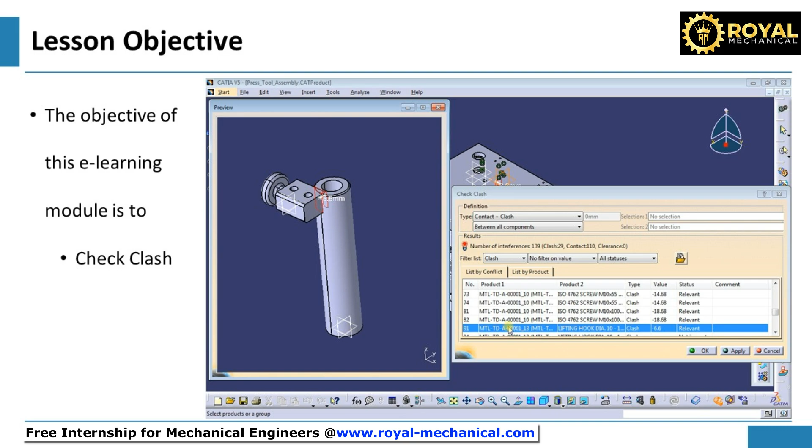Now let me demonstrate the clash check. Click on the Check Clash command. Select Contact plus Clash for the type. And then select between all components. Click on Apply. Observe the contact and clash are listed. Observe the results. There are 29 clash and 110 contacts in the press tool.

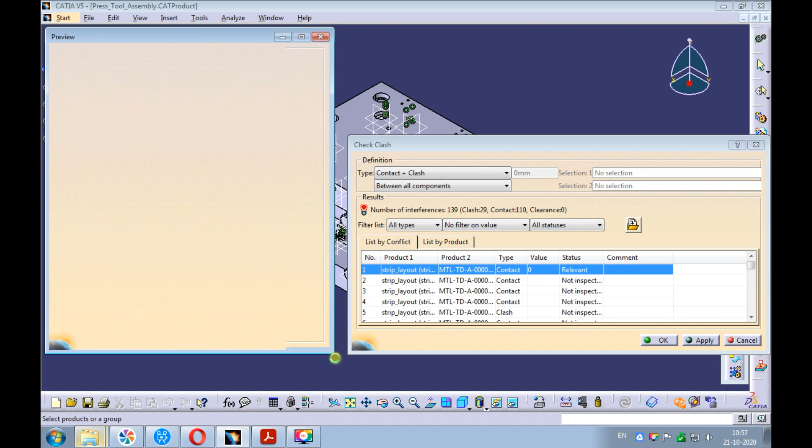Product 1 and Product 2 indicate the parts between which contact or a clash exists. The type lists whether there is a contact or a clash between Product 1 and Product 2. Observe the item number 1 is a contact between the strip and the die plate. Yes, the strip always sits on the die plate. There is nothing to worry about this contact.

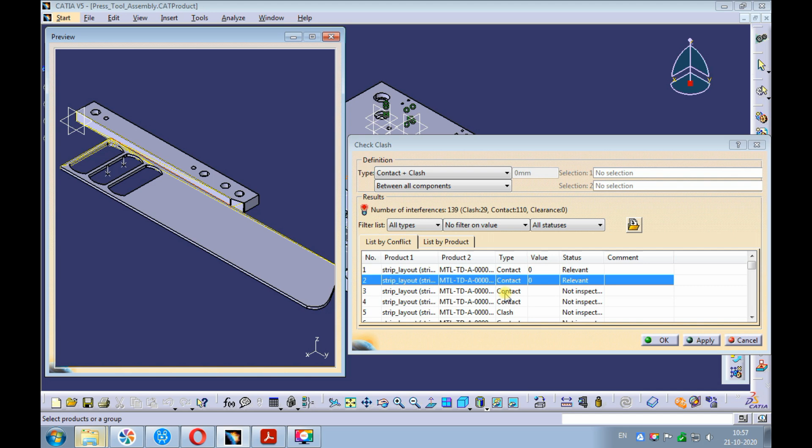Observe the item number 2 is a contact between the strip and the rear strip guide plate. Yes, the strip always touches the rear strip guide plate. There is nothing to worry about this contact. Similarly, we can check each item, one by one. Observe the clash between the strip pusher and the strip. Remember, we had designed this clash intentionally.

We can filter only the clash items by selecting Clash in the filter list. Now only the clash items are listed.

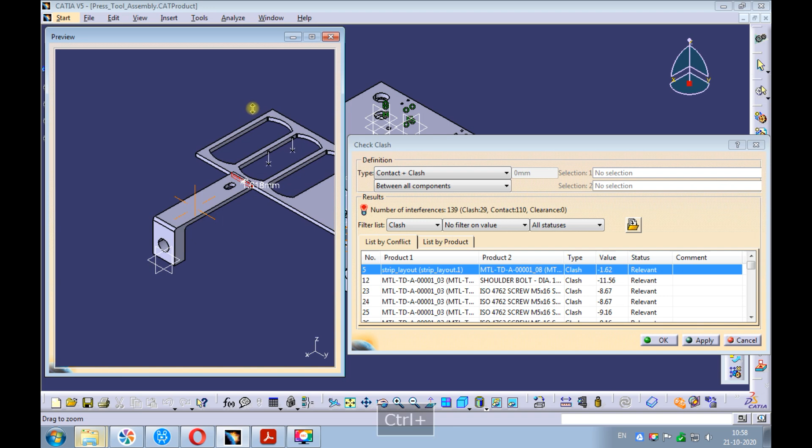Observe the clash between the shoulder bolt and the die plate. The clash between the screw and the thread is expected due to the thread engagement. There is nothing to worry about this clash. Similarly, you can observe the clash between the screws and the plates to which the screws are applied. It is essential to check each clash.

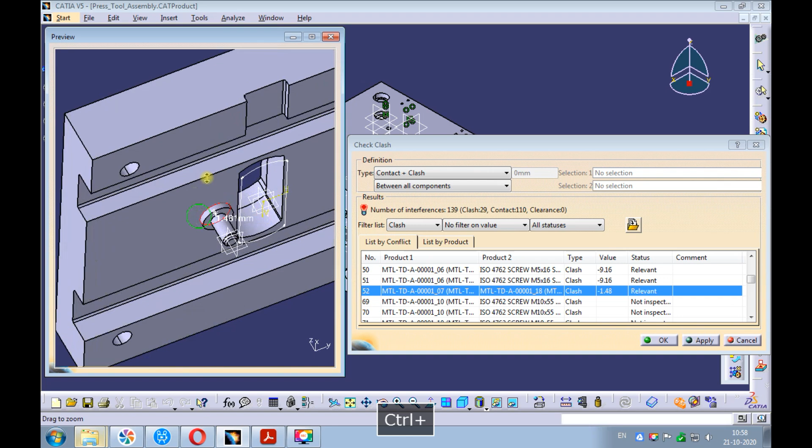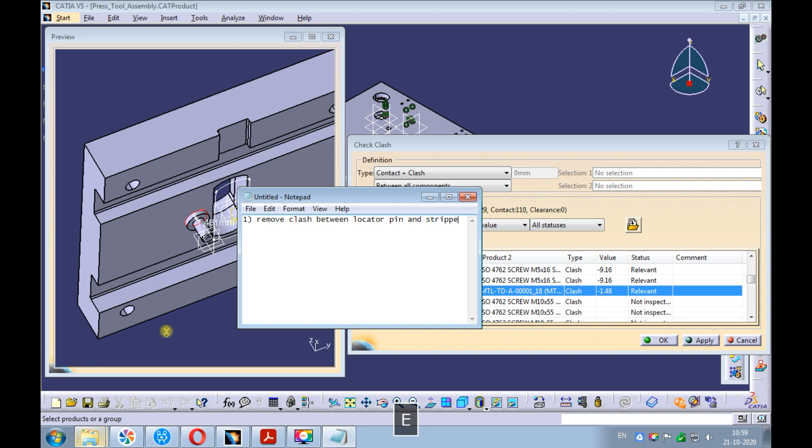Observe the clash between the locator pin and the stripper plate. This clash is critical. This clash must be removed. Let's make a note of it. Remove clash between the locator pin and the stripper plate. Let's continue with the clash check.

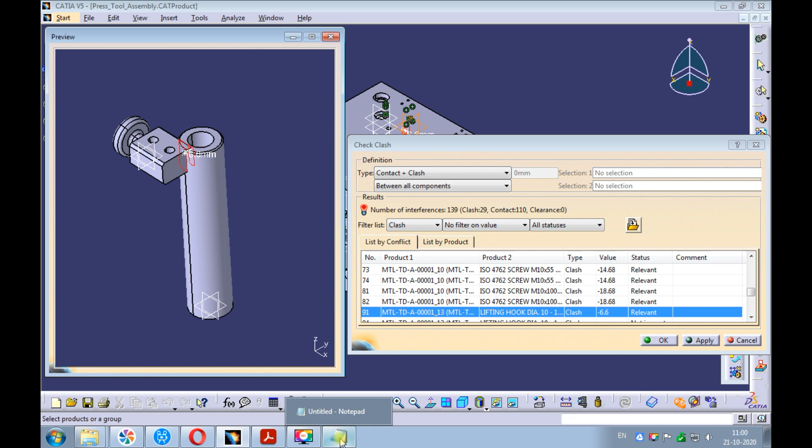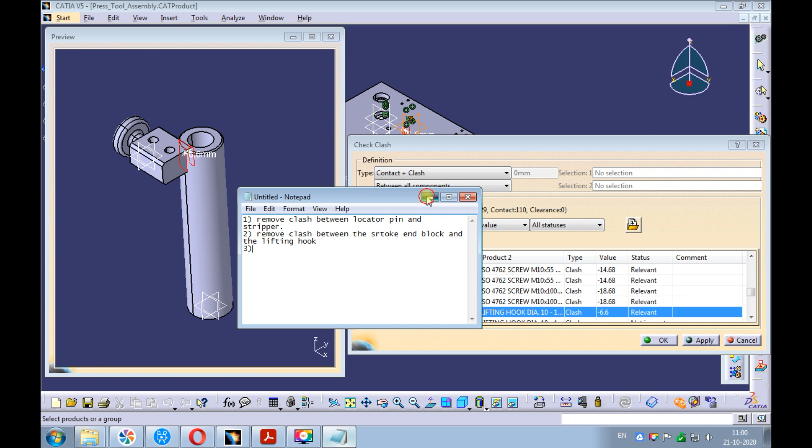Observe the clash between the lifting hook and the stroke end block. This clash is critical. This clash must be removed. Let's make a note of it. Remove the clash between the stroke end block and the lifting hook. Let's continue with the clash check.

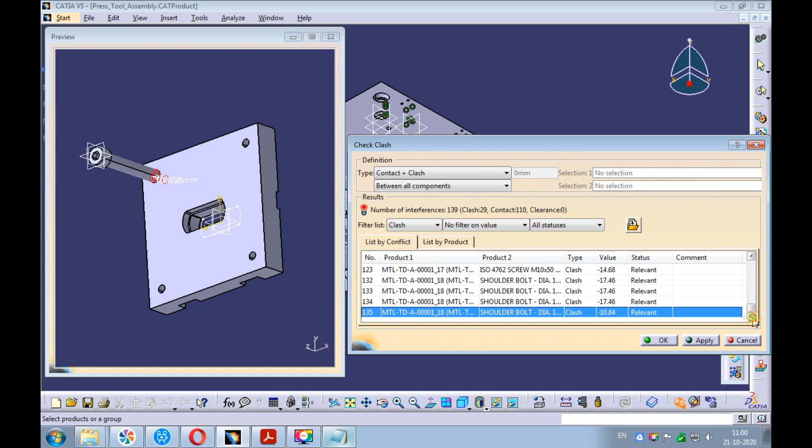No more critical clashes found. With this, we have successfully learned how to check clash for all parts of the press tool in CATIA V5.